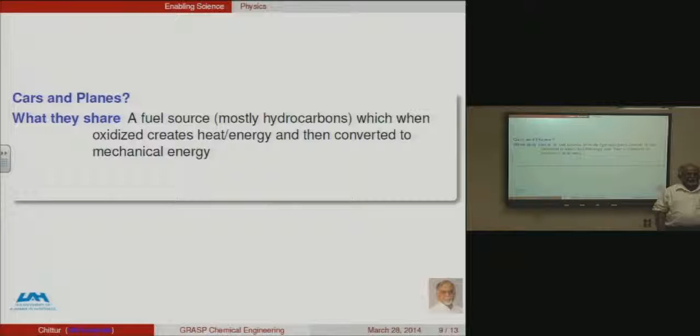All right, so let's continue talking about planes and the concept of the lift, for example, and the Bernoulli's principle, right? But before we go any further, let's ask a question. What is the similarity? Remember in the first couple of weeks, second, third week, we talked about automobiles. We talked about the combustion of fuel, the oxidation of hydrocarbons to create carbon dioxide and water, and the energy that was used to move the cars, right?

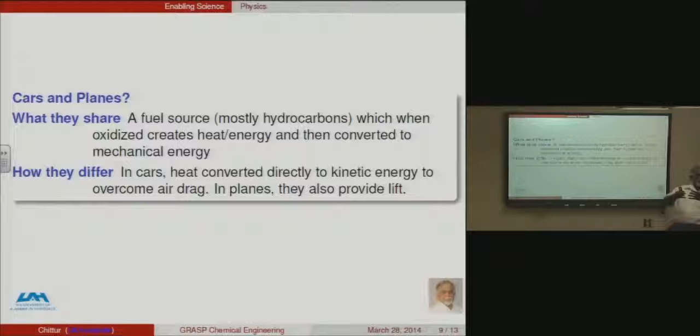So what's similar between automobiles and planes? In one sense, they're similar because you're burning a fuel that creates heat and energy, and then it's converted to mechanical energy, right? How do they differ? Well, the first difference is that in automobiles, the combustion occurs in a chamber, right? It pushes the piston and therefore pushes the tires, and therefore you move the car forward. And the kinetic energy is used to take care of the air resistance on the car.

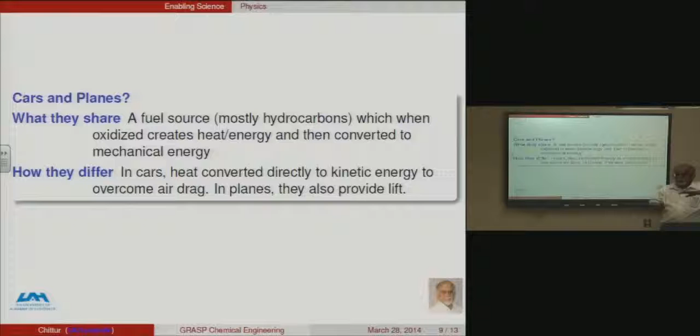In planes, that also happens, right? You need to be able to move forward. But in addition to that, you need to provide lift. And so the key there is that you need to design them in such a way that the air will be flowing around the wings in such a way that you'll also have lift. So in one sense, you have forward motion, kinetic energy in both cases, but in the case of a plane, you need to have lift. So you need to design the plane in such a way that you'll also have lift. Okay.

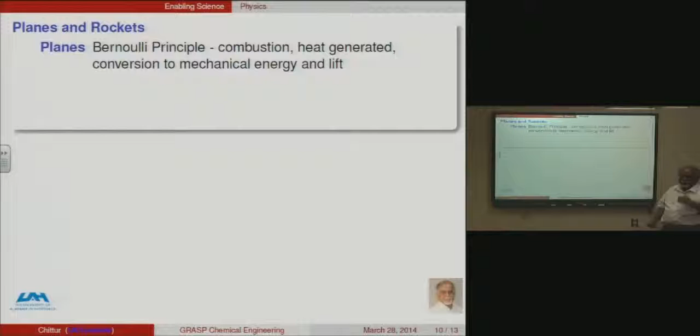What is the difference between planes and rockets? If you've heard about going to the moon, to space, and so forth, right? For planes, the core principle is the Bernoulli principle. That is combustion, the heat that is generated, the conversion to mechanical energy, and then designing the wing in such a way that you actually get lift, right? You design the wing so that you get lift, and the plane can go up and also go forward because of the kinetic energy from the burning of the fuel.

In rockets, the key principle is not the Bernoulli's principle, but Newtonian mechanics: every action has an equal and opposite reaction. You must have heard about it, right? And the other important thing with rockets is that on Earth, and even for planes at fairly high altitudes, the oxidizing agent, oxygen, is in the air. So automobiles and planes carry a fuel, but they don't carry their own oxidizer. For rockets, on the other hand, for it to go to the moon or wherever, you need to carry your own oxidizer. It could be liquid oxygen, for example, or some other oxidizer. So that's a key difference, right?

The other difference, of course, is the Newtonian mechanics. It's not that it doesn't use the Bernoulli principle. For example, you can imagine that the space shuttle is trying to land. It lands like a glider, like a plane. So obviously, the wings are designed in such a way that it can land in a controlled fashion. But for the most part, you're looking at Newtonian mechanics principles, where the gases that are created and burned in these chambers are expelled with such a high velocity that it propels the rocket in the other direction. So that's the other key difference.

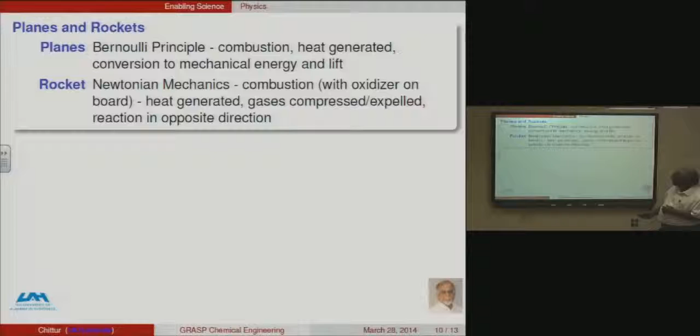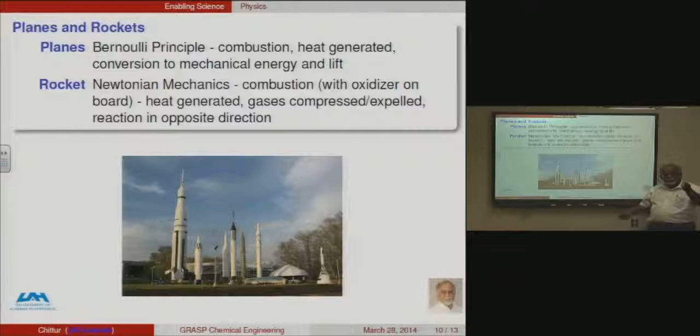And if I'm not mistaken, this could be from our Huntsville, Alabama Space and Rocket Center, with a bunch of these Saturn V rockets and other types of rockets. And the key here is that, unlike planes, it carries a fuel that is burnt and the oxidizer at the same time. Okay, so the plane, as I said, flies because of the Bernoulli principle. There's a pressure differential, right?

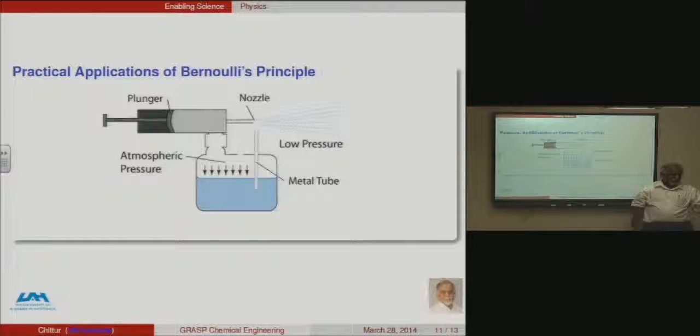So what we're actually doing is using the principle that by pushing air at a very fast velocity past a certain location, we are reducing the pressure, thereby forcing liquid up a certain tube. So it's a good example of use of Bernoulli's principle.

It depends on how you orient the sails in such a way that it can create a differential pressure and then have a net force in the direction that you want to go. And so again, an illustration of Bernoulli's principle. Now, I'm not a sailor myself, and I don't know how to use the sails, but the idea there is that you allow the wind to flow in such a way that you have a net force going in the direction that you want to go. So the principle is very similar.

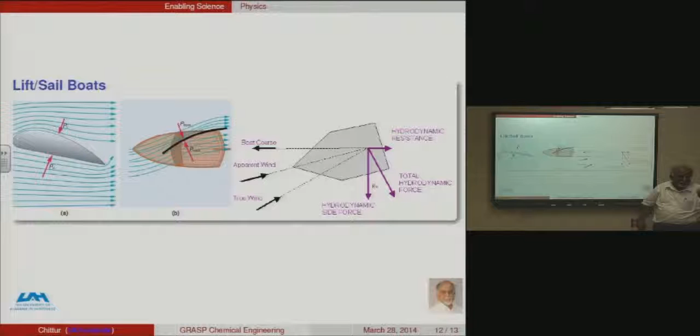You can actually draw these force diagrams and show that in some cases, even if the wind is, for example, going in this direction, by adjusting your sails, you can make the boat go in a direction that appears to be almost directly against the way the wind is blowing. So it's an application of Bernoulli's principle too. So it's pretty fascinating.

One other application I want to show you as a reminder. When we're in a plane, we want the plane to be in the air and not on the ground, and keep flying as long as possible, unless we want to come down. If you're driving a car, our objective is to remain on the ground, particularly with race cars. If you're going really fast with a race car, you want to make sure that you stick to the ground as opposed to flying all over, right?

I'm really simplifying this whole idea. But race cars, for example, are designed to be very stable and stay close to the ground. So they think about how to design the race car in such a way that the air is flowing underneath the car at a very high velocity, resulting in a net force acting downward on the car, keeping the race car right on the ground as you would want.

So as it says, air increases the velocity, reduces the pressure, and the atmospheric pressure actually pushes the car onto the ground. Now, you might have seen some ordinary cars with some of these stickers in the back; I'm not sure whether the effect is large enough in an ordinary car. But certainly in a race car, that sort of effect becomes absolutely critical.

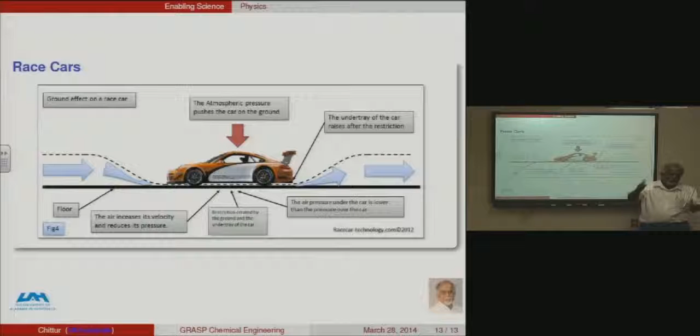So what we've done in these two videos is to link up an important concept called Bernoulli's principle, energy balance, to how planes fly, and to how boats are able to go with sails in a direction against the wind. And so I hope we can appreciate it the next time we get on a plane and look at the wings, at how those things are being moved around to adjust the lift, adjust the direction in which we're moving, and so forth. So I hope that was fun.